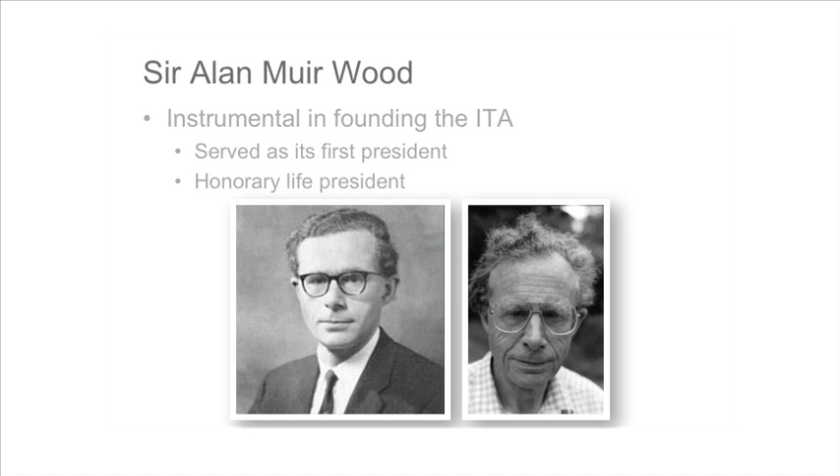Alan was always friendly, inquisitive, and encouraging to me. He was known to be conservative in his engineering views, but was open to consider innovative approaches to underground construction. We all have been blessed by his leadership. His accomplishments have made a lasting impression on the tunneling industry.

So, to continue, Mr. President, former ITA presidents, Madam Minister, delegates, ladies and gentlemen, my lecture will be mostly about machine tunneling with a historic perspective and how things have been changing and developing. I will start at the beginning with the idea of using a machine to bore a tunnel.

It started in 1846 at Mont-Cenis, not far from here. I will show a series of historic slides about these early tunneling machines, and my lecture will concentrate on pictures mostly from the Robbins Company. I hope I'm able to convey that there are many very capable competitors in our business - I just have more Robbins slides than any of the others.

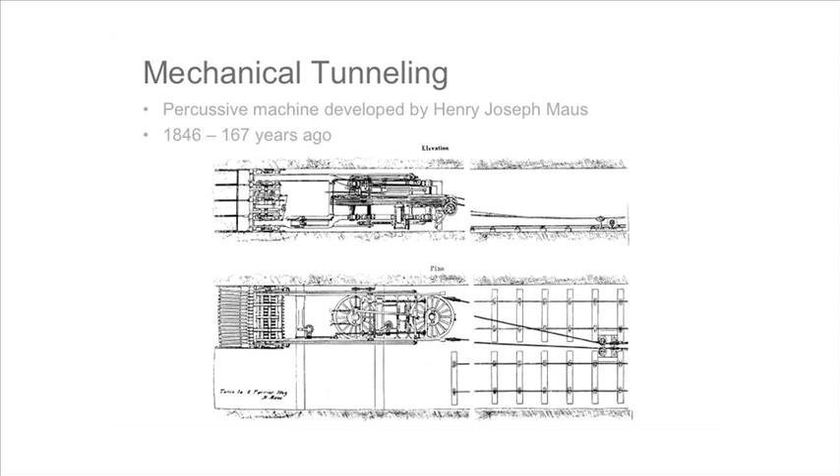In 1846, a Belgian mining engineer, Henri Maus, conceived of the idea of building a tunneling machine to bore a rail tunnel in hard alpine rock to make an improved connection between Italy and France. His concept was a percussive drill employing 80 drill bits, each operated with a spring-loaded striker. This was before we had compressed air, before we had even dynamite, and the job finally came to the use of black powder, because this machine, although it was heavily tested, didn't make the grade.

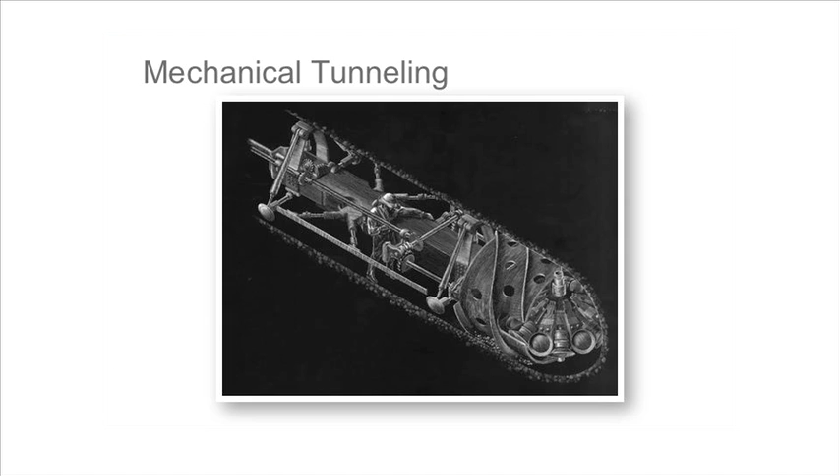Another machine was designed and built only 5 years after Maus, in 1851, by Charles Wilson in Boston, Massachusetts. This machine was meant to bore the Hoosac Mountain Railroad Tunnel. It eventually bored only 3 meters in very tough metamorphic rock before being abandoned. But it employed some very ingenious features - a rotary cutter head, in this case with double rotary axes, and disc cutters. Rolling cutters were even then recognized as being essential to boring hard rock.

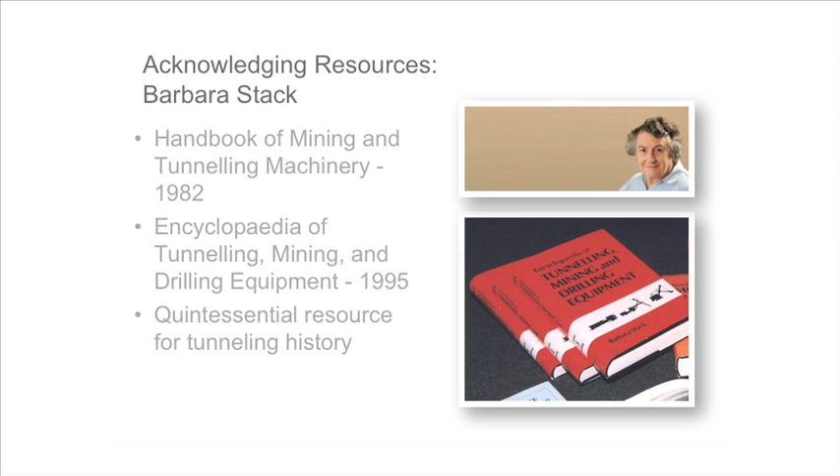So, to acknowledge Barbara Stack - we would have no knowledge of this fascinating history of tunneling machines if it were not for her. She is an Australian researcher, historian, chronicler, and marvelous writer. We owe this huge field of knowledge to Barbara Stack. We've used some of her information to put together a timeline and include a few more ancient slides in addition to those of Maus and Wilson.

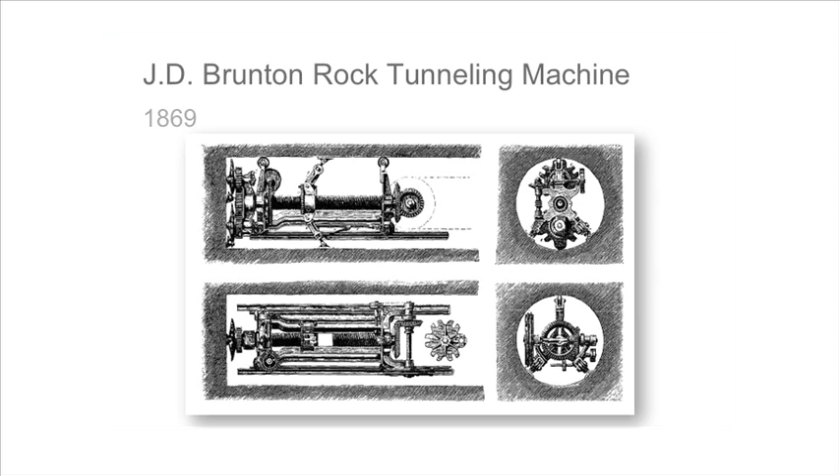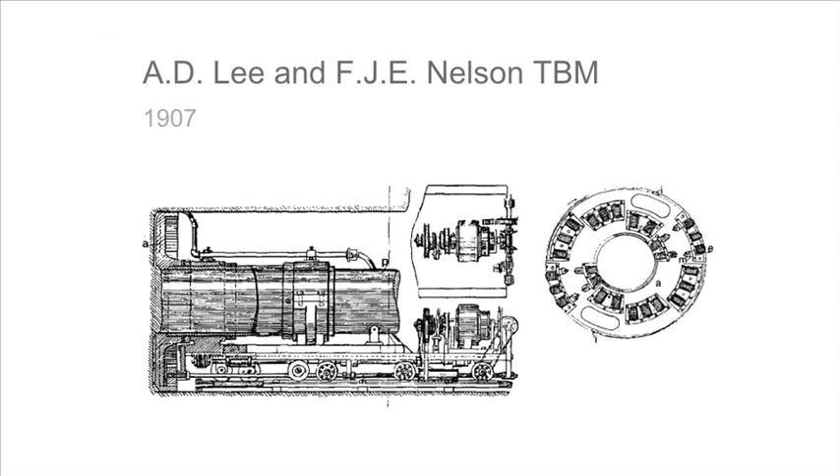We now come to Cooke and Hunter in 1865, Brunton in 1869 with satellite disc cutters, a Spaniard named Unanue in 1903 with 17 percussive hammers run by steam, Lee and Nelson in 1907 with 26 gear-type rotating cutters cutting about 90% of the area of the face but leaving a large central core to be removed independently, and Whitaker, a machine tested on the Channel Tunnel site at Shakespeare Cliff in 1922.

So that's just a few of the ancient tunneling machines. Barbara Stack identified 45 different types of rock tunneling machines between 1846 and 1952. Tunneling machine development seems to have come in bunches, with gaps of 10 to 30 years. Many of these inventors must have believed they were the first person to conceive the idea of a tunneling machine.

That was certainly the case with my father, James Robbins. My father, Jim Robbins, was a mining engineer and an inventor. He moved his family from Alaska, where he was mining gold, to Chicago, Illinois, when the mine was forced to close due to the Second World War.

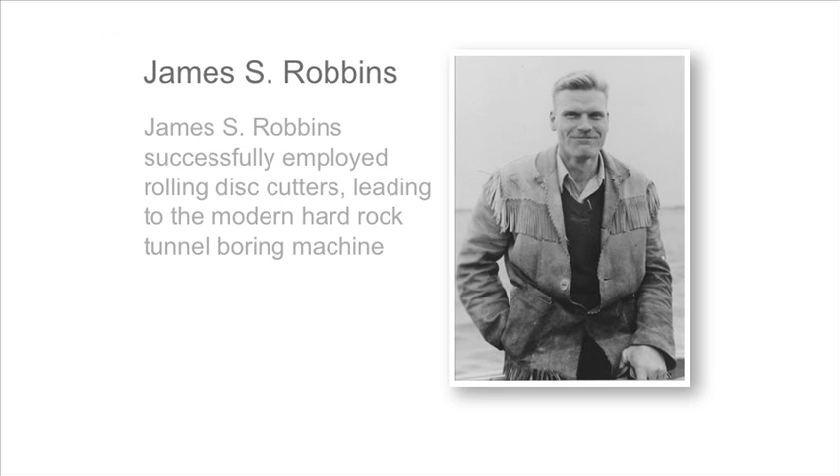In that area, he started consulting with Illinois coal mining companies, and he discovered an old mining machine that hadn't been used for many years. Jim Robbins was funded by the CW&F Coal Company to rebuild this machine and try to make it work, which he did. That's the first machine that he built, or rebuilt.

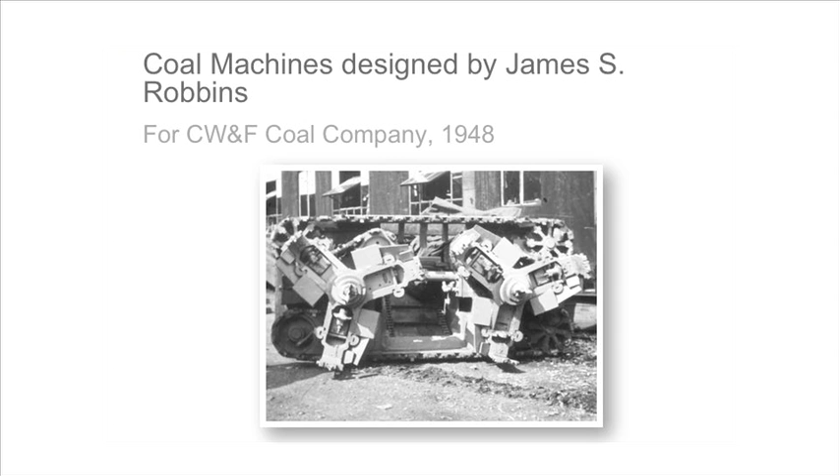The next slide shows the view of the coal face, with the cutter heads and a trimming chain bar to make the top and bottom flat. You can see the pattern of the cutters.

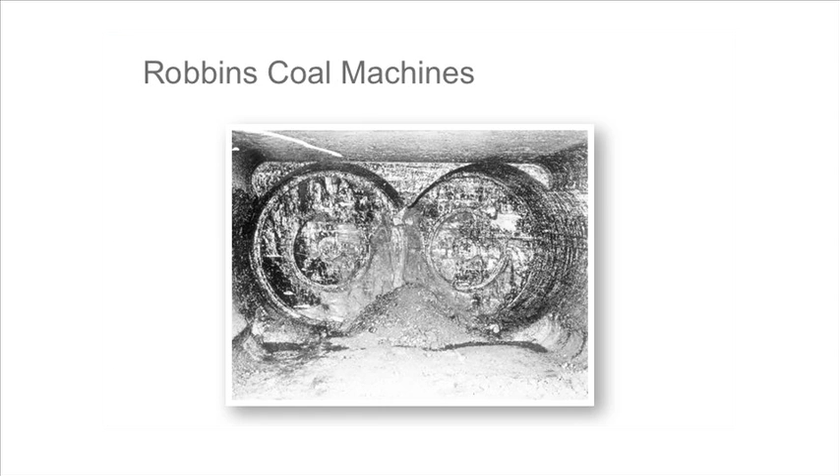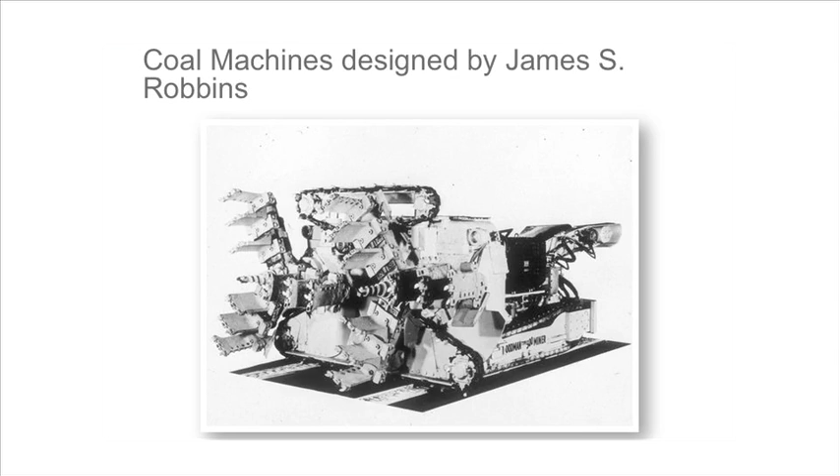Jim Robbins built 4 coal miners between 1947 and '51. He sold this development and his 14 patents to the Goodman Company of Chicago, a manufacturer of electric mining machinery. Now we're into 1950.

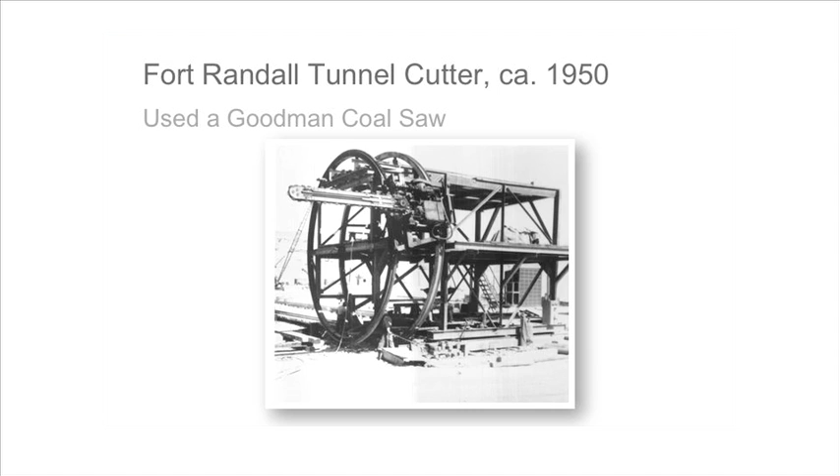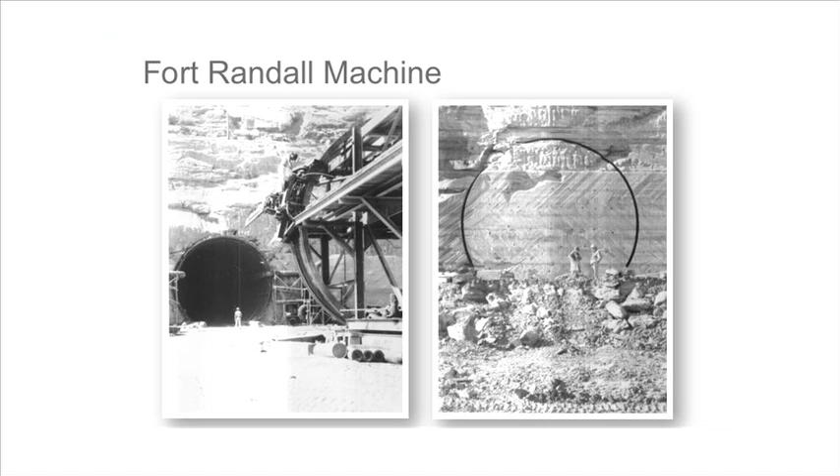Here we can see the Fort Randall Dam on the Missouri River. This tunneling system was unique, possibly due to the fact that there was weak shale rock in the tunnels that had to be built at Fort Randall. The Goodman coal saw was used to cut the periphery of the tunnel, and the central block of rock was blasted. The Oahe Dam, further upstream on the Missouri River, was to be the next major project.

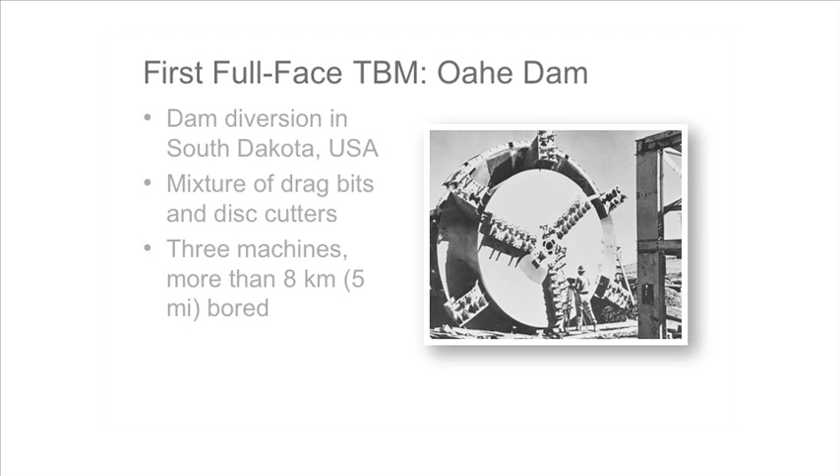Here we can see the first tunneling machine for the Oahe Dam. Jim Robbins convinced the contractor, F.K. Mittry, to allow him to design and finance the construction of a machine that would bore the entire face and eliminate blasting and loading.

This machine was the first of the new age of rock boring tunneling machines, starting a new era that has lasted to this time and on into the future. This machine broke an existing world tunneling record of 18.5 meters in an 8-hour shift. The machine was an economic success for Mittry, who made a profit.

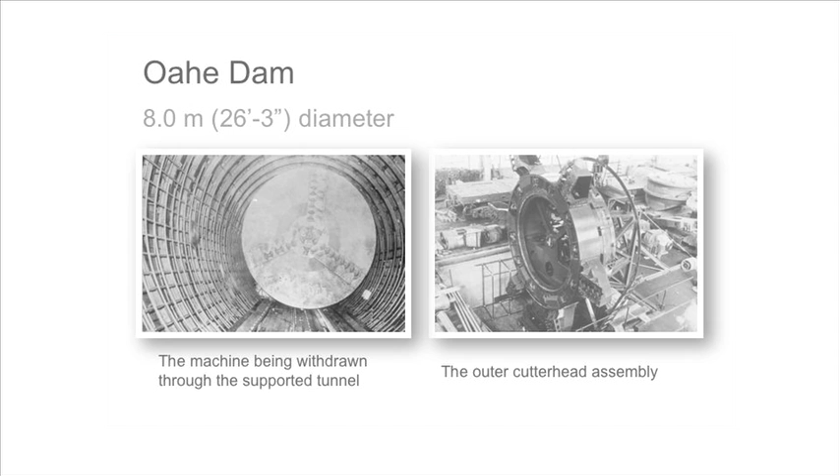This is also a novel experience for a tunneling machine. This machine and 3 others for this project were completed. They all completed their work, and the machine tunneling this was a first.

Between 1954 and '57, several smaller hard rock machines were built to bore sewer and water tunnels, and the rock proved to be too hard - in this case dolomitic rock in Chicago, and limestone and sandstone in Pittsburgh. None of these machines were a success, and all were withdrawn from their tunnels.

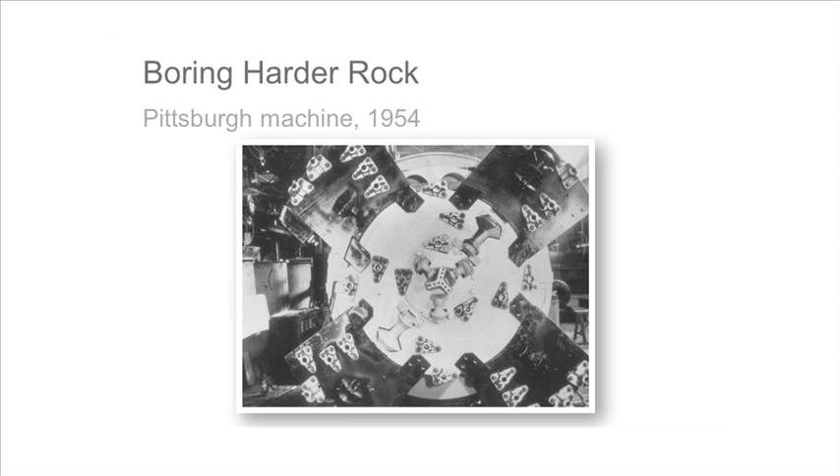Here we can see the Pittsburgh sewer tunnel with layered hard sediments, and the marks clearly show the drag pick grooves and traces of rolling disc cutters in between the grooves. These picks failed very quickly.

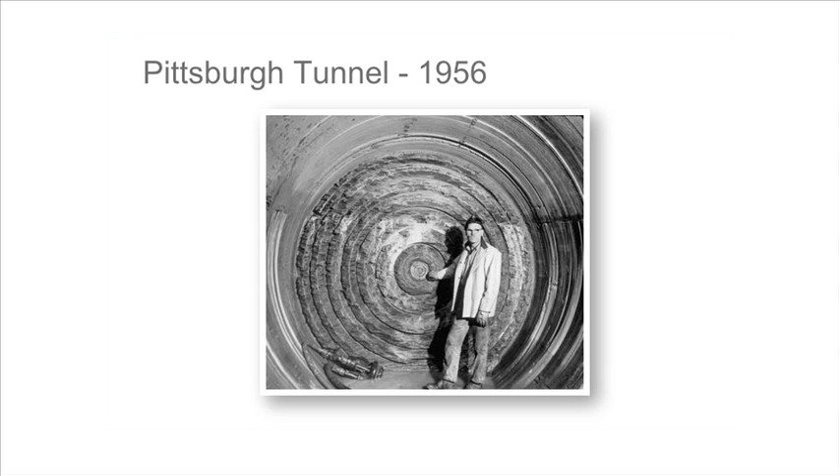Now in 1956, the Humber River sewer was built near Toronto, Ontario, and there was a very significant breakthrough here in machine development over the last 100 years. The engineering materials were now harder, tougher, with better bearings and better seals.

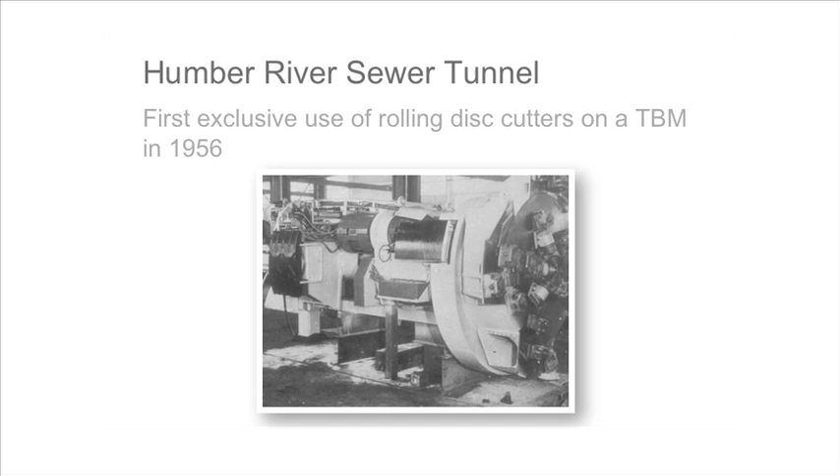And here you can see the way the previous tunneling cutter systems were, with the drag picks and the disc cutters rolling between them.

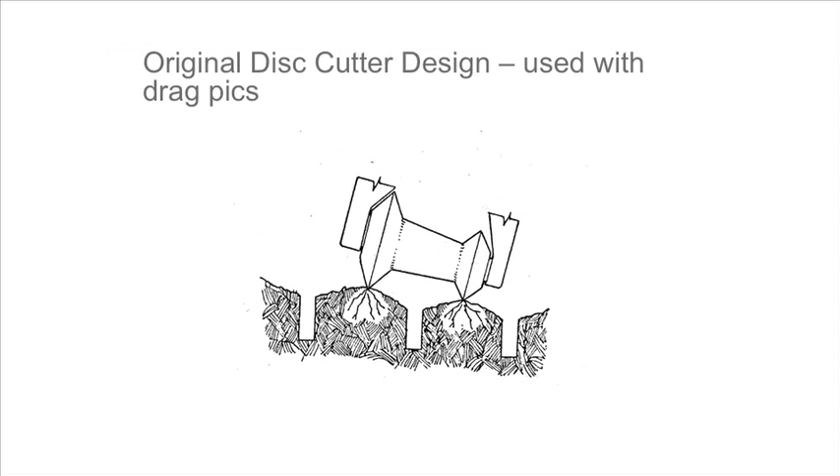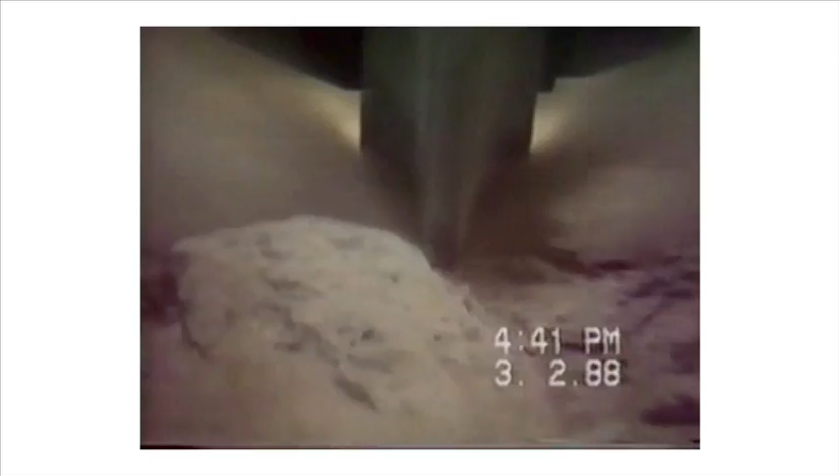Now I will have, I hope, a little video here - a tunnel breakthrough, and then a laboratory test at the Colorado School of Mines in their rock laboratory. So you can see how these cutters work - they're basically just crushing the rock.

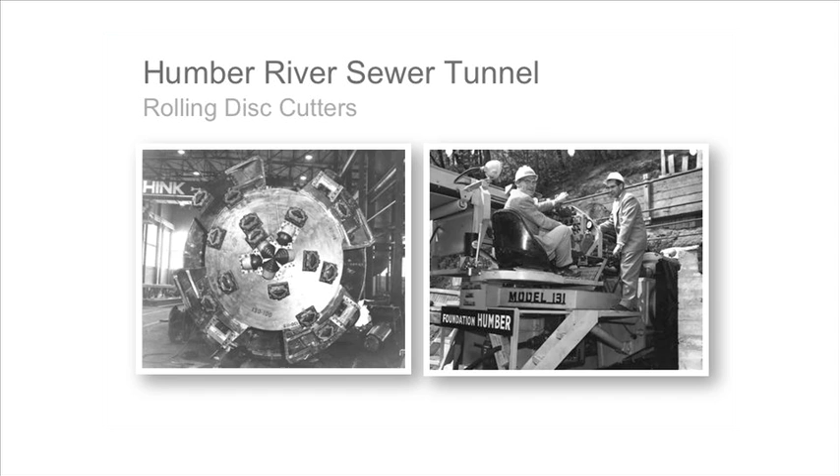Here you see a view of the cutter head designed for only disc cutters, and there you see Jim Robbins in the driver's seat of that machine. This was a very important breakthrough, and this use of disc cutters only in hard rock has survived for the next 60 years, and then, of course, sometime into the future.

A year and a half later, Jim Robbins died in December 1958 when he crashed his airplane. His contribution to machine tunneling was profound.

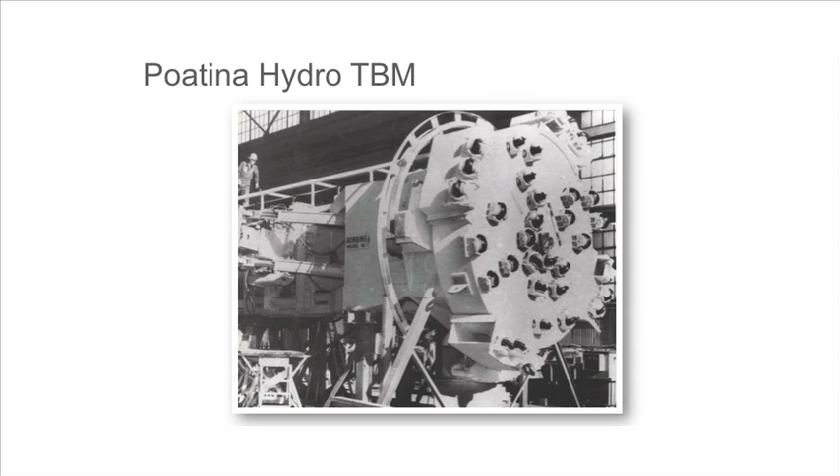So here we see the Poatina tunneling machine from Tasmania. It was built in 1959 and '60. The owner, the HEC of Tasmania, was the ideal contractor to push forward and develop more machine tunneling success. They could fix anything that needed to be fixed or modified. They just needed really good cutters and the basic machine to work, and that's what they got. Here we have also an unusual gripper mechanism, which we developed at that time.

This feature allowed the cutters to last much longer because the machine could be steered continuously. This machine achieved a tunnel rate of 229 meters in one 6-day week. This was another world's tunneling record.

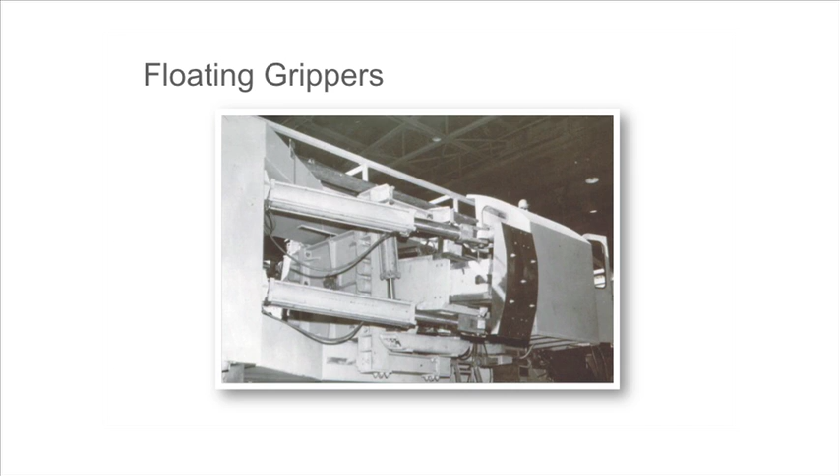With the advent of several tunneling machines achieving real success, an increased number of contractors began to see this equipment as a possible new tool to consider when bidding a rock tunnel. When several machines set world tunneling records for advance rates, tunneling machines became even more appealing. This fact was also noticed by construction equipment manufacturers.

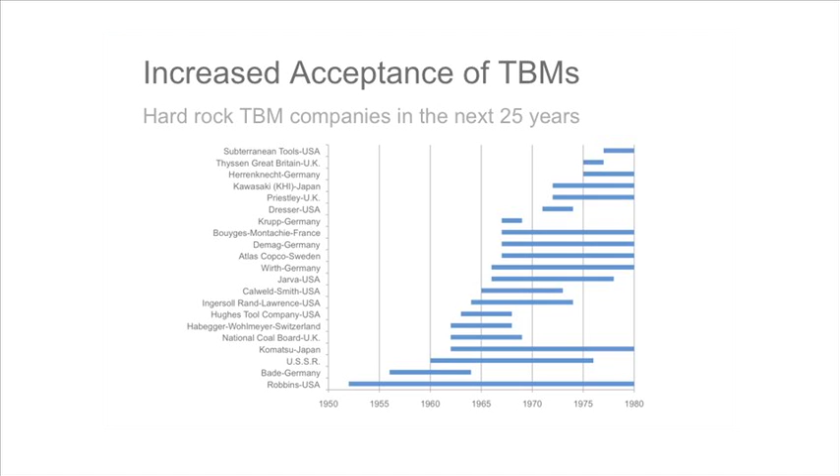So we have here a rapid explosion of designers and builders of tunneling machines around the world. From the US, from Sweden, from Switzerland, Japan, Germany, and the USSR were some of the first to operate in this manner. Some manufacturers built only one or two machines. Others, like Atlas Copco of Sweden and Wirth of Germany, continued to work on improving their technology for a period of the next 40 to 50 years. And we'll run through these very, very quickly.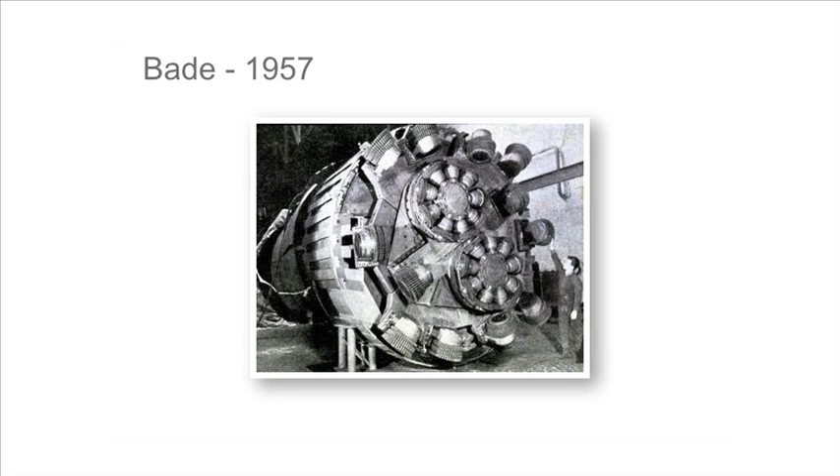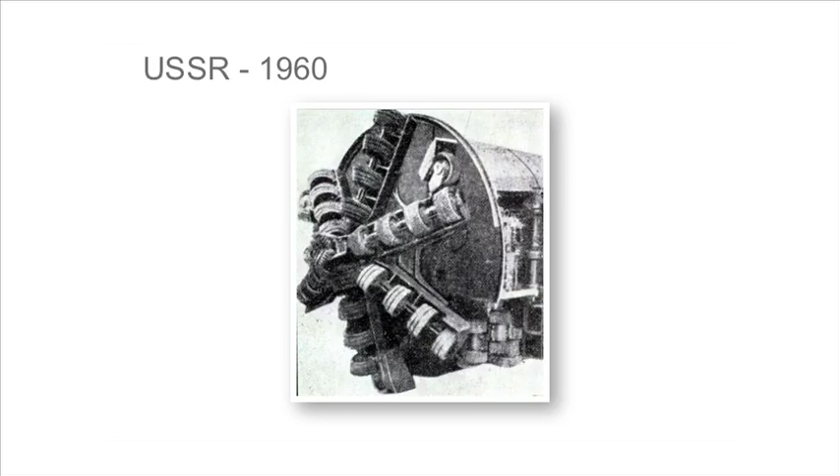Bade Company in Germany in 1957, very unusual design. The USSR had built this tunneling machine in 1960, also gear-type rolling cutters. The Komatsu tunneling machine in 1963 - Komatsu became a licensee of the Robbins Company, and they built a shielded hard rock tunneling machine which could expand and retract within the center of that hard rock shield.

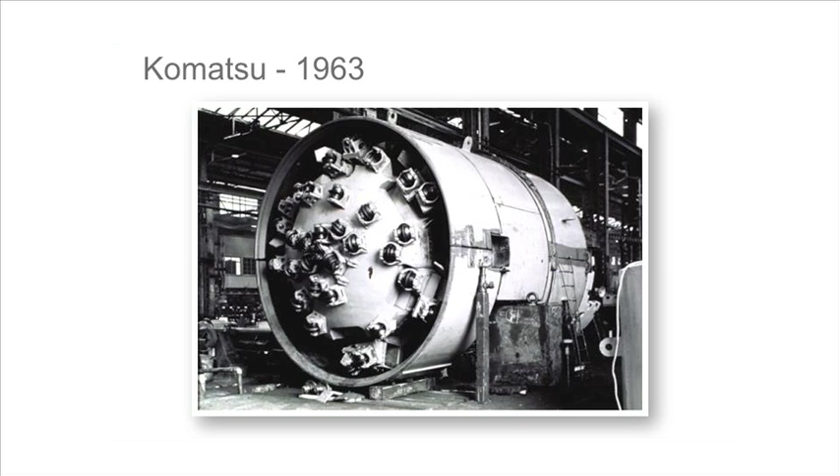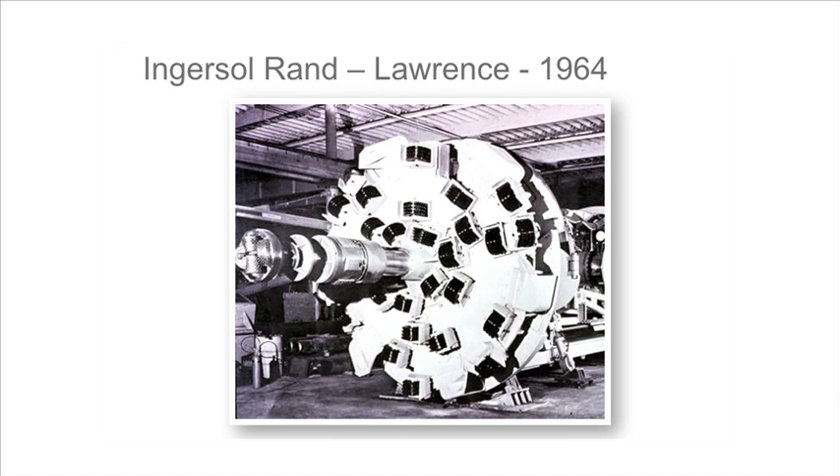Ingersoll Rand and Lawrence in 1964 built this kind of machine with a pilot pull capability, and it actually gripped and pulled the entire machine forward for its cutting thrust. This machine was built by Hughes Tool Company in 1965. It was called the Betty 1. It completed a very successful long water supply tunnel and was the first machine to use electronic lasers to steer the machine.

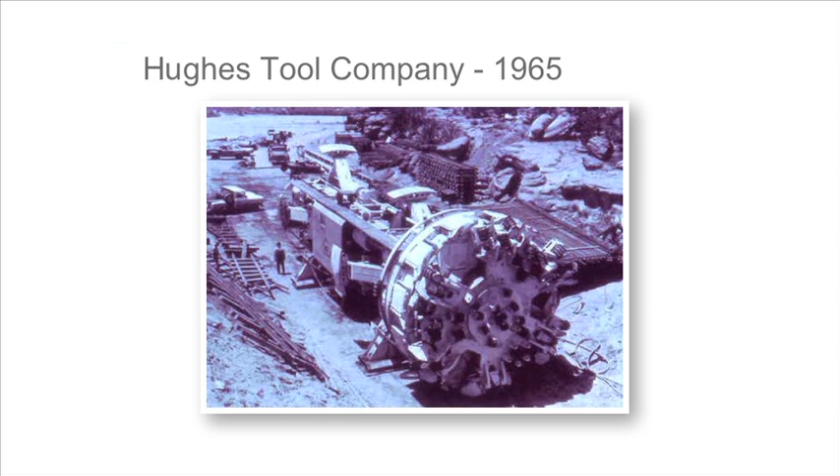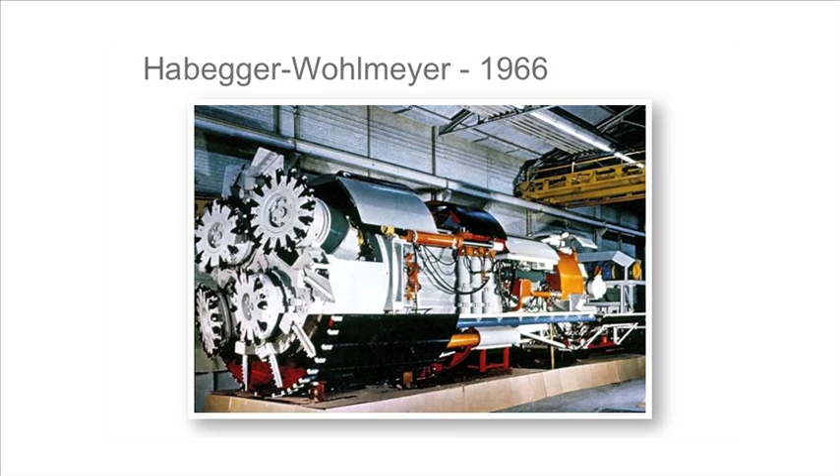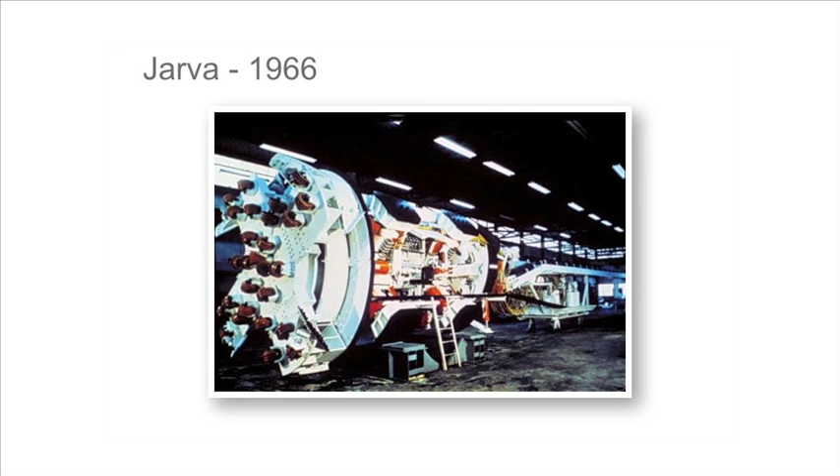The next is a joint project here from two countries, Habegger and Wohlmeyer in 1966. Habegger of Switzerland and Dr. Wohlmeyer of Austria conceived of this undercutting technique, which was very successful in very hard rock, but the cutters didn't last very long. So this became a development which was acquired by Atlas Copco. Then Jarva in 1966 in the US built a whole series of tunneling machines quite successfully, and they also were acquired by the Atlas Copco Company.

So now to discuss some new directions which the Robbins Company took, starting a bit further back. In 1961 and '62, the Robbins Company was offered the opportunity to design and build a high-speed rail tunnel machine for Paris, for the Paris RER Metro. This was in very mixed ground, rock and soil, well below the water table and running right near the Seine River.

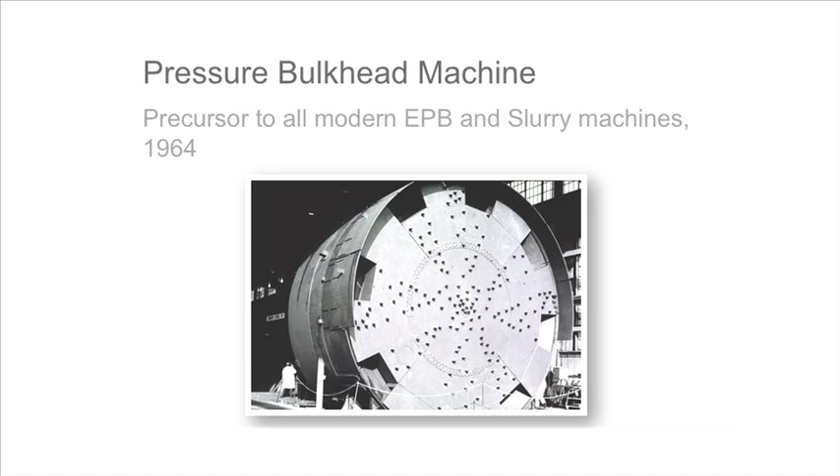This required the new machine to work while excluding the groundwater while the rock was being cut and evacuate the rock out of the tunnel. This was a case of a successful innovation - the first rotary cutter head pressure bulkhead shield.

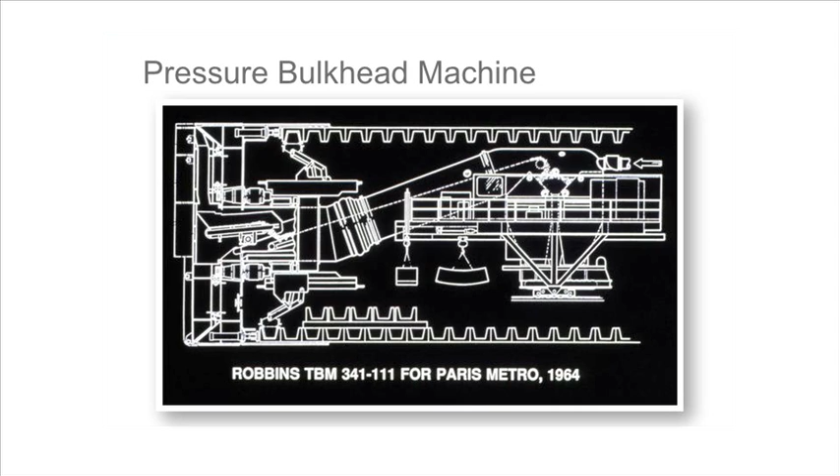This machine used compressed air behind its rotary cutter head to control the water pressure and support the face while allowing men to operate in free air. It was 10.3 meters in diameter, and the machine withstood up to 2.5 atmospheres of pressure. Here you can see the cutter head of this machine being lowered at the Étoile in the middle of Paris, and the kind of segments which were used, which were bolted and sealed. So there were a lot of new features in this.

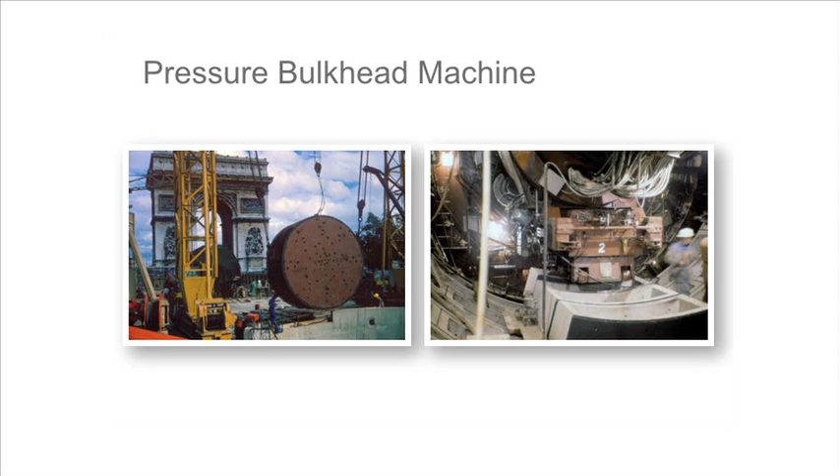So now another new development: double shield for bad rock. The design was originated by myself on a flight from France to Italy. The machine utilized two shields, interlocked, that protected the machine and the tunnel from rock falls from the tunnel face to the point where the segments were installed.

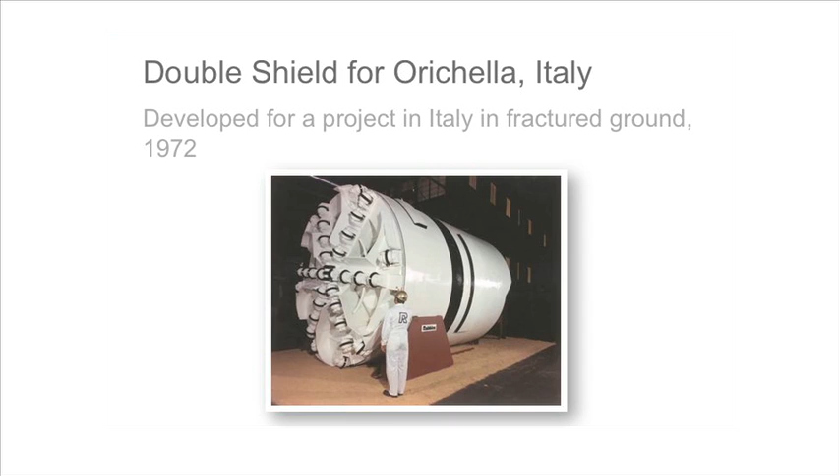I had made a visit to Carlo Grandori in 1972. Carlo was using a 6.4 meter open rock boring machine installing precast concrete segments at the Brasimone tunnel. That was also a new concept. So I reviewed my sketches with Carlo Grandori, and his reaction was positive. The company - this is the SELI company, his company - was positioned to be in the forefront of the double shield tunneling machine from then on.

The next project is about the Channel Tunnel. A few years later, the Channel Tunnel was again on the top burner. This tunnel was of world significance because it had been under design and startup for over 100 years at this point.

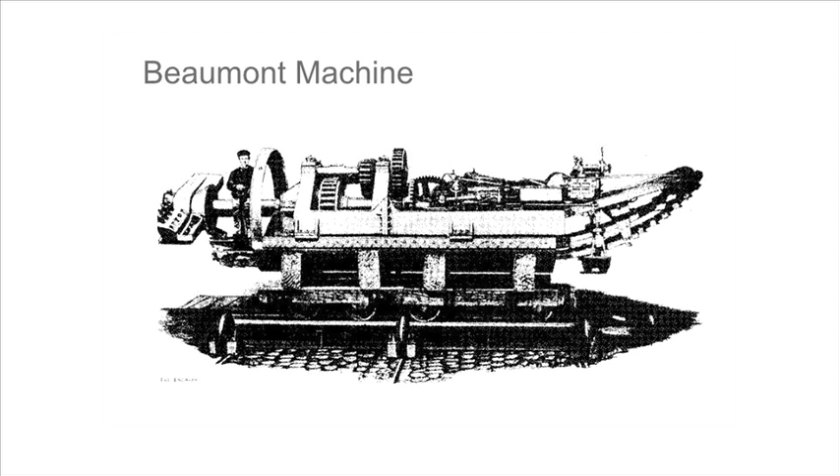Here's one of two machines built by Colonel Beaumont, which bored 1.8 kilometers of tunnel at that time before work was stopped due to political pressure.

But then we have the next near start for the third time, which was 1973 and 74, when two machines were built, one by Robert Priestley Limited and the other by the Robbins Company.

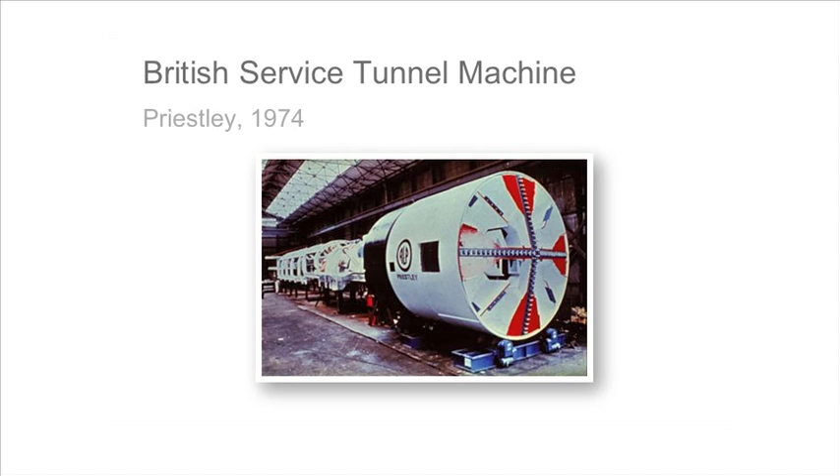The project was canceled by the British government just as the Priestley machine was completed and delivered. However, a 30-meter long test tunnel was built to demonstrate what the machine could do, and it did very well. They bored that 30 meters and could have just kept going.

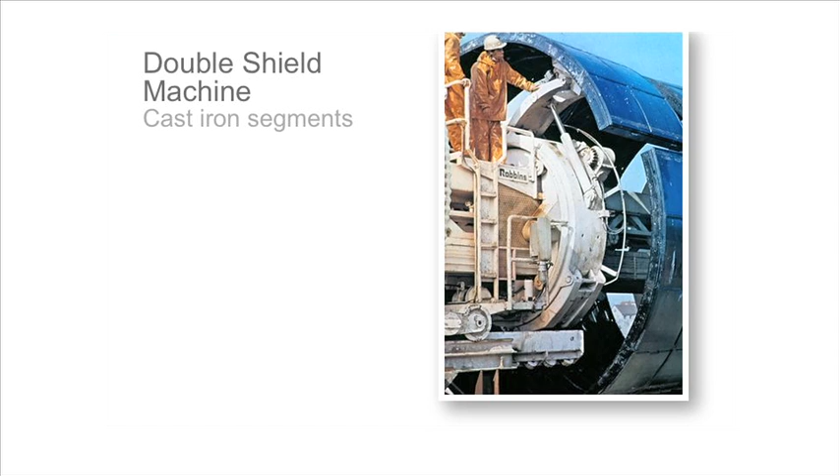The Robbins machine at that time - in 1974, Priestley and Robbins were together. Robbins' machine used cast iron segments erected within a double shield. This machine was never put underground, but eventually was boring sewer tunnels in Turkey.

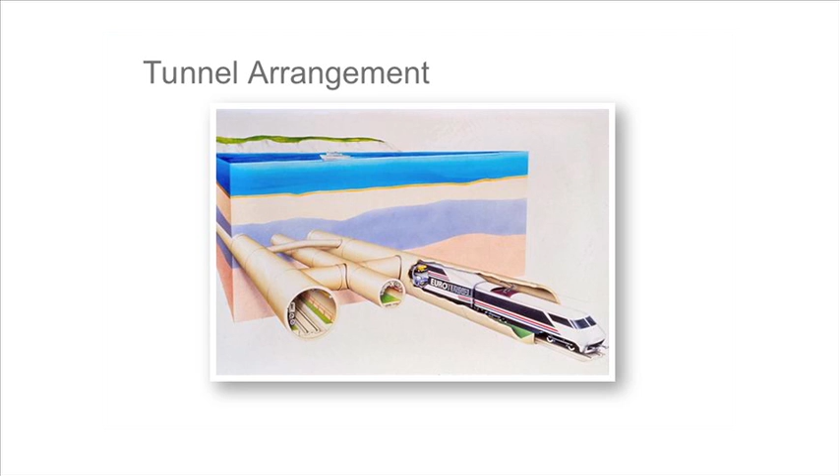Then in 1987, and this is a story that most of us already know, final approval for the Channel Tunnel was given, and this was the job that would actually get done. France and Great Britain signed the agreement, by Francois Mitterrand and Margaret Thatcher, and here you can see there were 3 tunnels. They required 6 machines for the undersea portion of the tunnel and 4 other machines for the land-based approaches. And we'll go quickly through these.

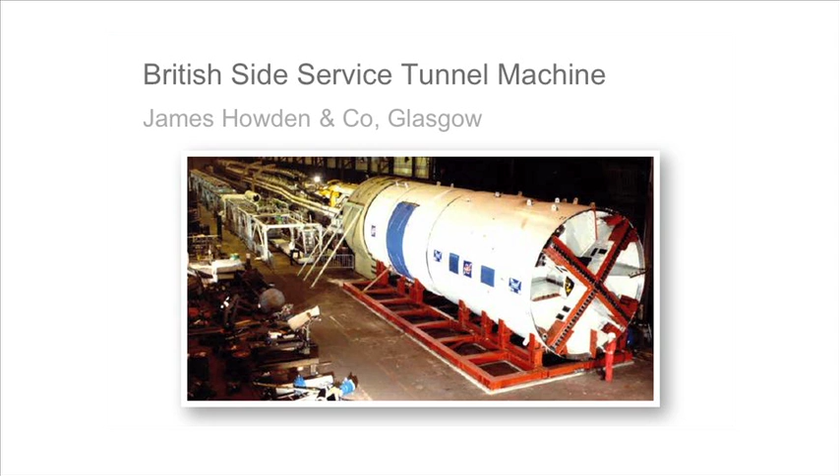The British side service tunnel machine was built by Howden and Company from Glasgow, and it was a double shield machine. This was a design which was based on our patents, and we were induced to agree to a license arrangement here in order to remain qualified for supplying the other British machines. And we are very happy that we did that.

The machine used on the French service tunnel, here, was an articulated single shield with a telescoping cutter head. This machine would work in very, very weak rock below the sea, up to 10 bars of pressure.

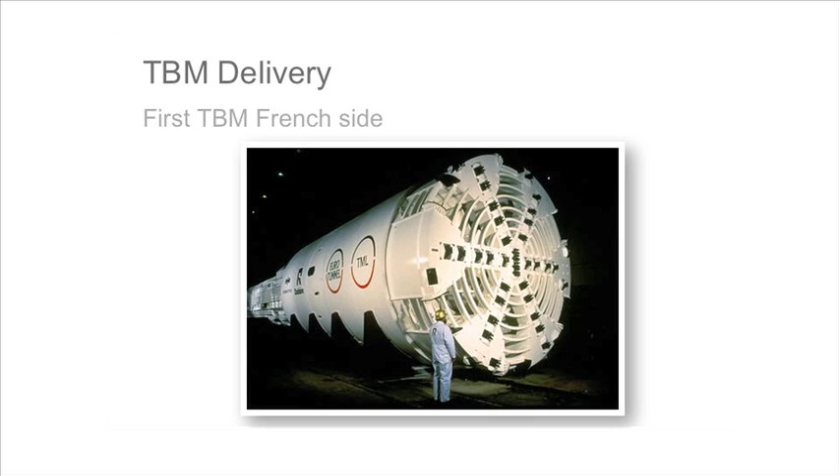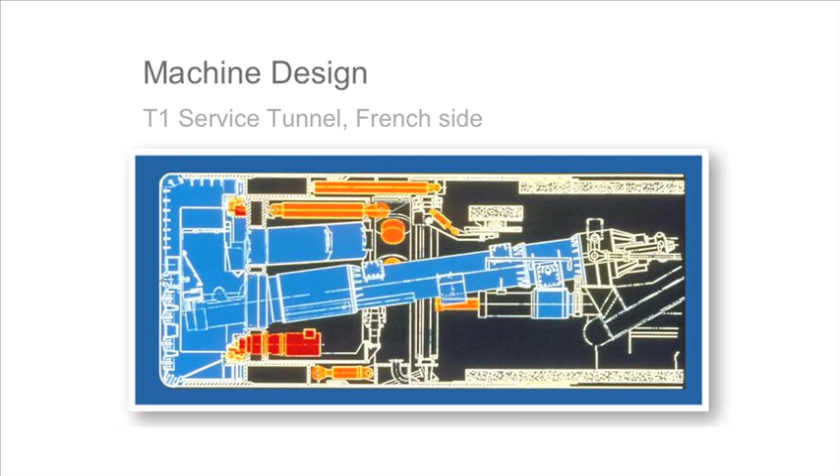This machine used the first large diameter double piston discharger to lock the tunnel muck out from this very high pressure into atmospheric pressure. You can see here the light blue is the pressurized part of that machine, which was 5.6 meters in diameter, and the double piston discharger at the very back of the screw conveyor.

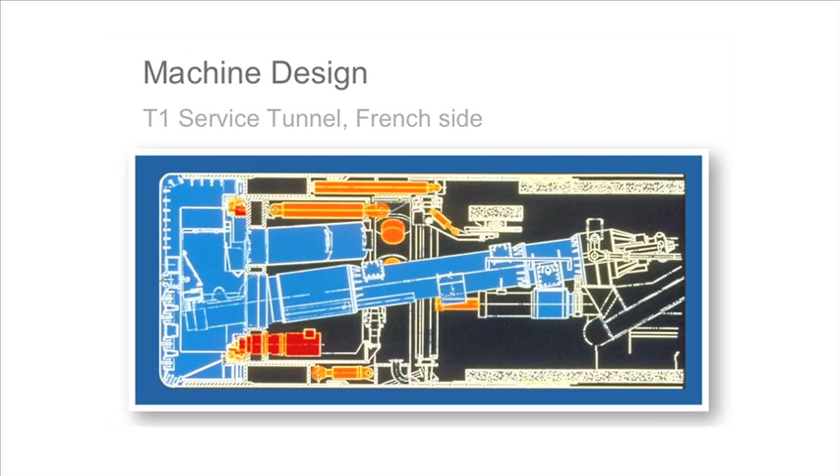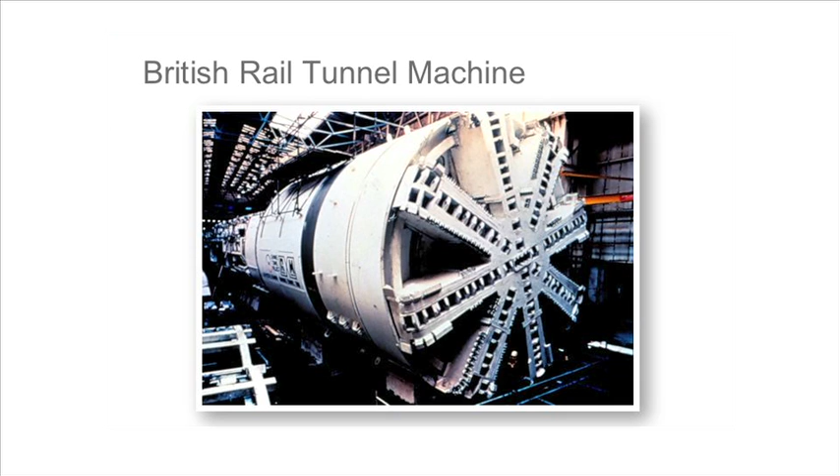The British side running tunnels, which were the main rail tunnels, are shown here, 8.3 meters on the British side, and on the French side, this was a telescoping cutter head design like we had designed for them.

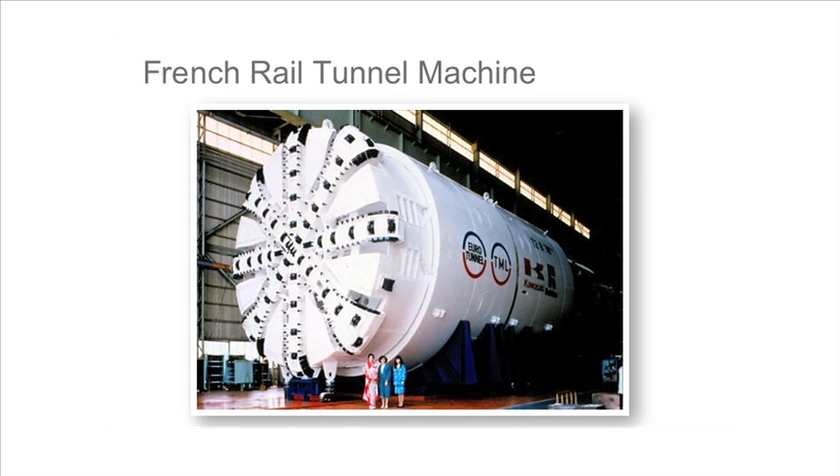This was a joint venture between Robbins and Kawasaki of Japan. Most of this equipment was built in Japan and in France, and they used a backfill grout very close to the cutter head so that there was less chance of failure.

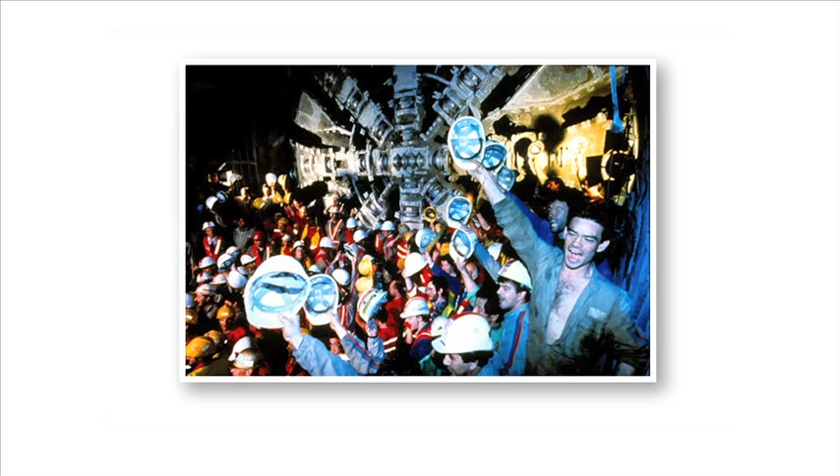Two service tunnel machines were completed in 1991. There was a ceremony with a breakthrough at Dover Castle. This is a shot of two breakthroughs occurring again when the main rail tunnel is completed, as the French machines bored into the openings connected by the British machines.

So here we have a little discussion about concepts that did not work. And actually there were quite a few.

The first one I show here is a walking gripper machine built in 1962, stepping back now quite a ways. It was a 2.2 meter sewer tunnel in Virginia. The idea was to use these 8 longitudinal grippers just behind the cutter head. This machine really did not work, so we modified it very quickly into a regular gripper type design. This hydraulic system was way too complex for us to fix in the tunnel.

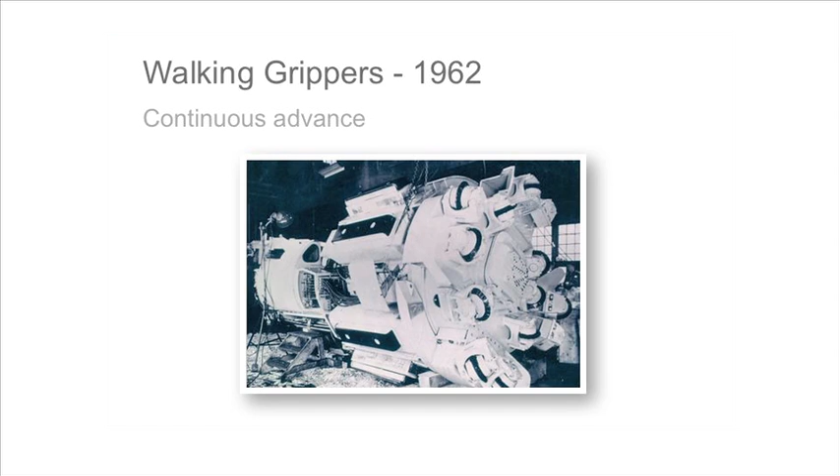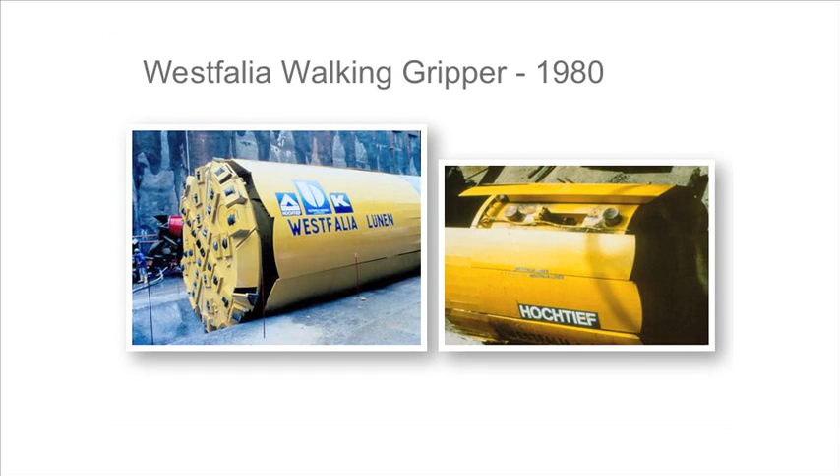Next here is a Westfalia Lunen walking gripper in 1980. This machine was for a project by Hochtief for a rail tunnel. It had the added complication that the concrete lining was pumped in behind the shove jacks and used as a thrust reaction. At the same time, it pre-consolidated weak rock. It did work, but was never tried again.

And so a few comments now about the culture of risk. Risk seems to grow for very heavy construction as the world economic system deteriorates. One possible solution is to use new models of contracts. New contracting models have been studied by the ITA and several other groups.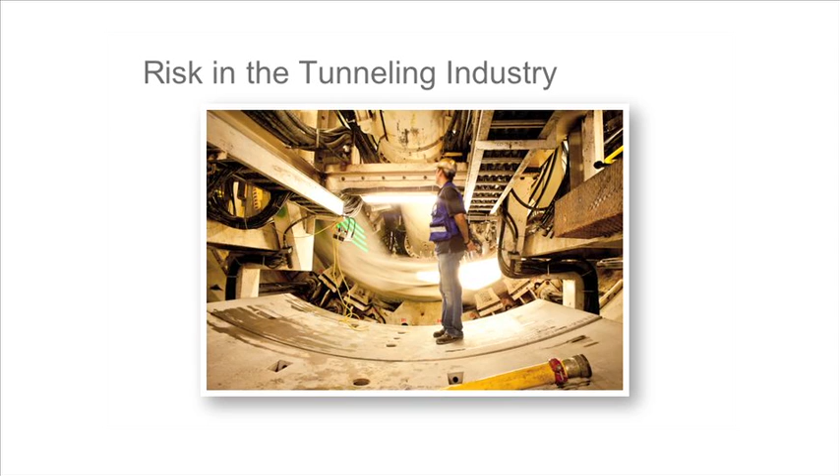Design-build adds a lot of new responsibilities to owners and contractors. The build, own, operate system was expanded with financial partners. Bigger projects may increase risks and increase political risk for the public. Litigation risks increase and legal issues become more important, so standardization and simplification become very appealing.

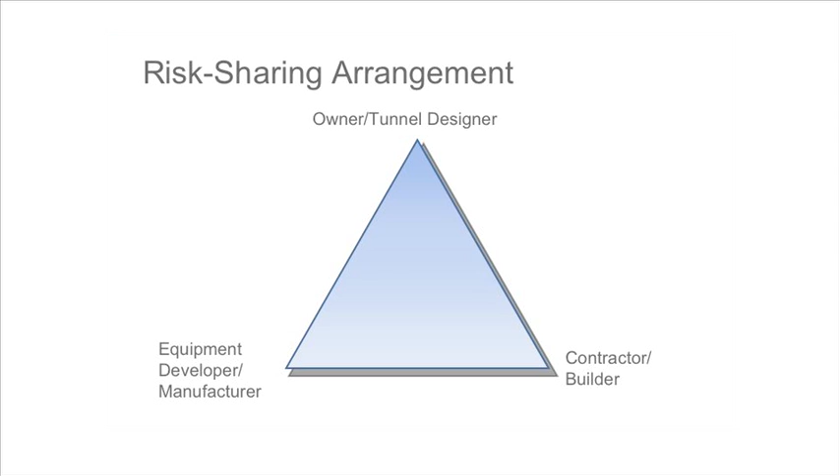Here's a classical risk-sharing relationship: the tunnel owner or designer at the top, the contractor tunnel builder on one side, and the equipment developer and manufacturer on the other. This has to be balanced and understood by all parties. When we start making huge mega projects out of these jobs, the responsibilities of the three parties become quite complex.

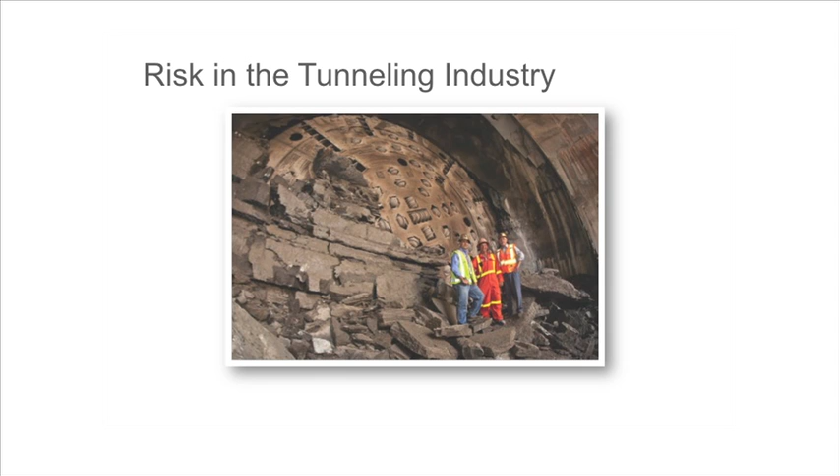In seeking relief from these risks, experienced international tunneling contractors have begun to look to emerging markets in Southeast Asia, the Middle East, and Eurasia. Contracting practices in these areas are growing and may provide a more welcoming environment to innovate designs and solutions, and a less litigious atmosphere.

We have some recent innovations here. The SR-99 tunnel in Seattle, Washington is a state route that is an economic challenge and a trend for limiting risk. Examples can be found where innovation is encouraged. SR-99 in Seattle is a replacement for a waterfront elevated viaduct damaged by an earthquake.

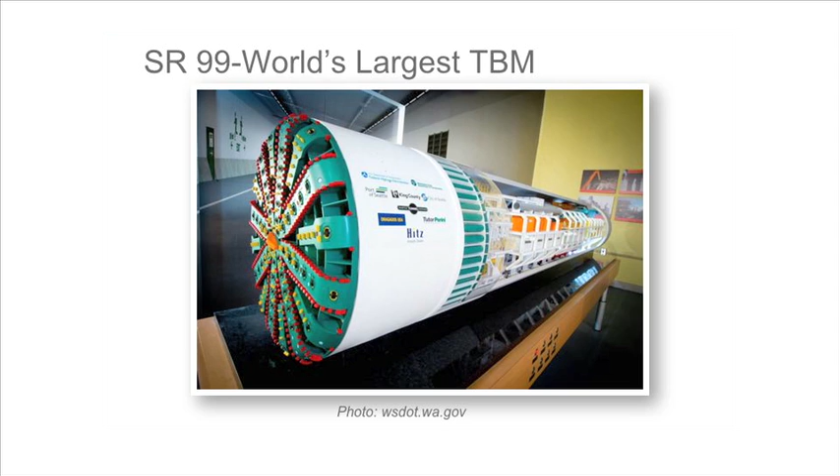Here we can see this is a model of the world's largest tunneling machine, 17.48 meters in diameter. The prime contractor is Dragados of Spain, with Tutor-Saliba and Perini as partners, and they selected Hitachi Zosen of Japan to design and manufacture the machine.

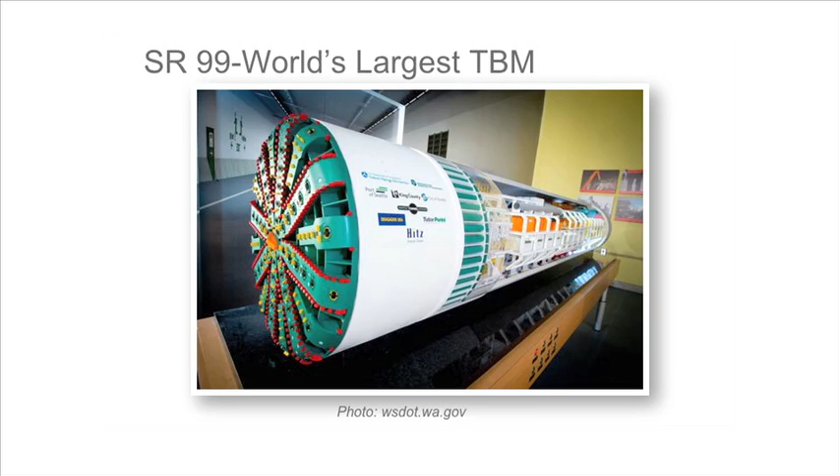Pressure compensated disc cutters are part of one of those innovations, with 7 bars of potential pressure, and these are under assembly at this point. You can see the machine is not yet assembled fully at the job site in Seattle, and the new pressure compensated disc cutters are shown here.

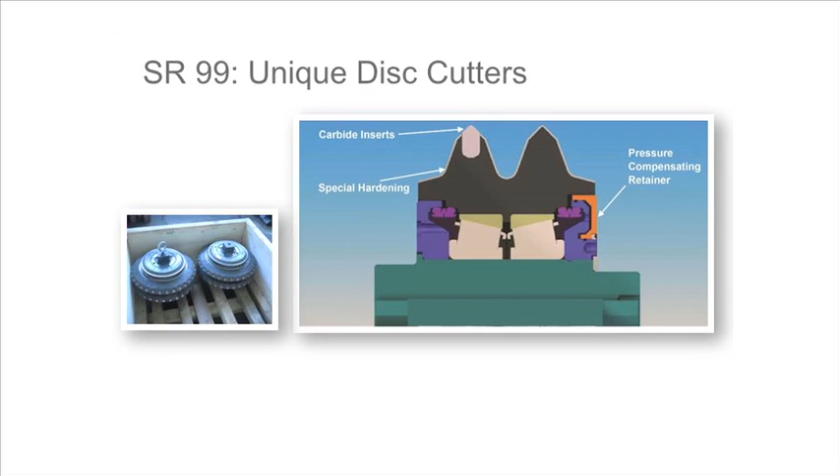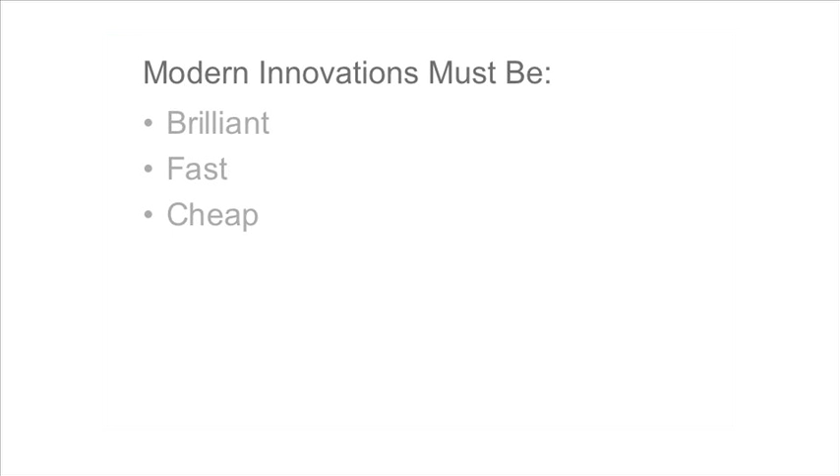So more on the modern innovations. In my opinion, these should be brilliant, fast, and cheap. There are many opportunities to make improvements in tunneling machines. This concept was developed by a contractor from Ontario, Canada, and is to provide a continuous, flexible support system very close to the tunnel face.

This method solves a need simply in a way that works. It can be implemented quickly and is relatively inexpensive. We've used this design for the Olmos project in Peru under the high Andes Mountains. This job has very severe rock bursts, which the machine was able to go through, except for the worst possible ones, which just crushed the machine.

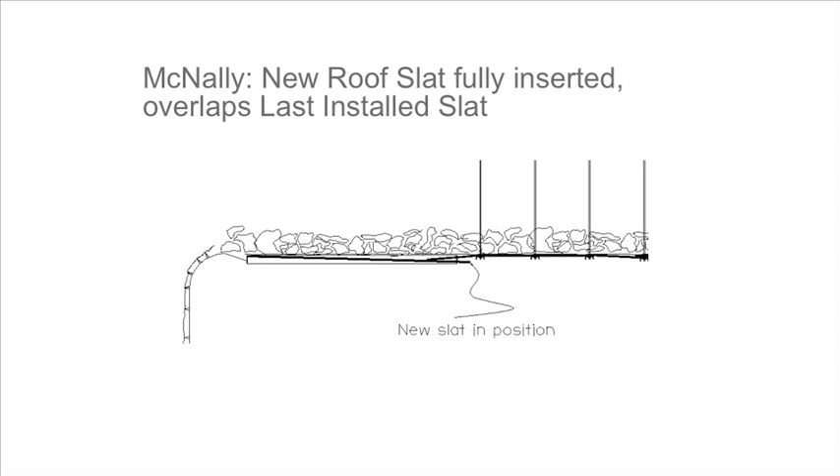These support elements are longitudinal slats. There's a great deal of advantage in using longitudinal supports, and pockets are included under the roof canopies. Here's a design drawing that shows how these slats are installed, overlapping, held together with rock bolts and very light segments of ring beams.

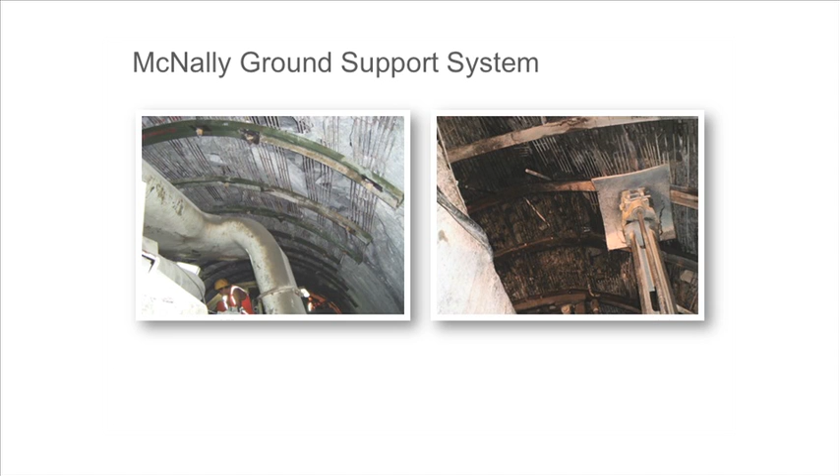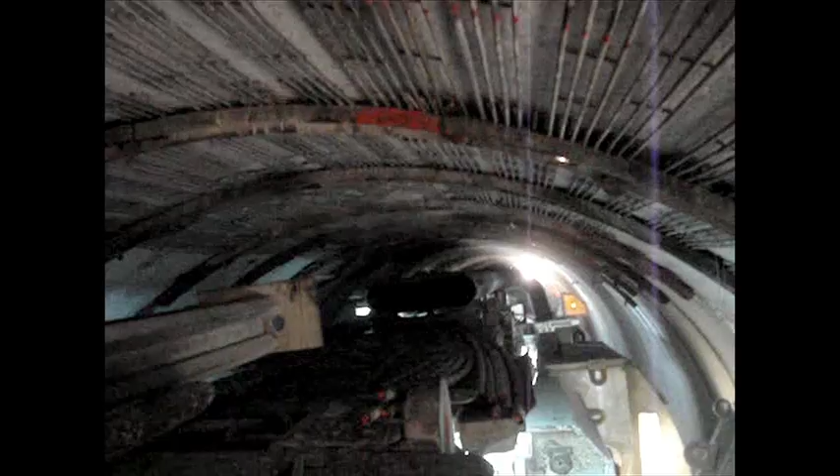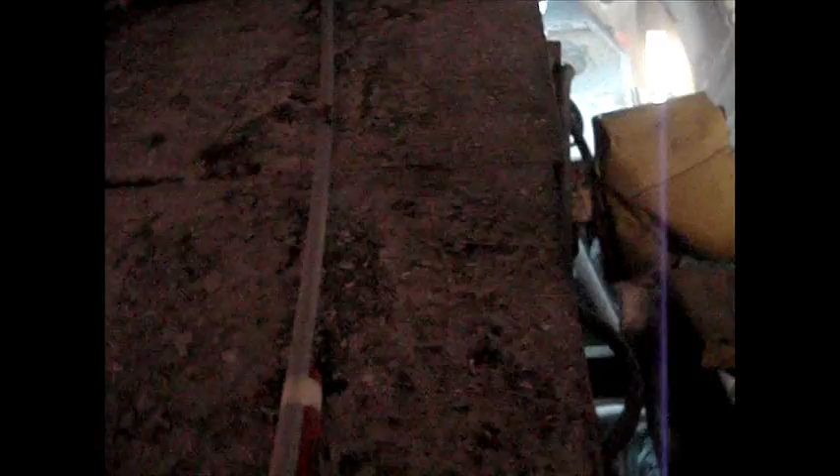Now there is a little video here, and you can see this. The bangs and noise are small rock bursts. There you can see the supports are still holding this up, even though the machine is actually sort of coming apart.

Let me continue a little bit to conclusions here. One of the current ITA initiatives is ITA Tech, and we've heard a little about that. This group is pushing new concepts forward in a manufacturing-centered group. They strive to achieve a consensus, and good work has already been achieved, including main bearing ratings and low rebound shotcrete, among other things.

Let me make the last comment, if I may. In epilogue, those of us who spent much of our lives in underground construction find pride in innovative design. The way forward is the future of tunneling through collaboration between the ground, the tunnel openings, and the people who work there. This is our environment.

We should pass on the excitement of creativity to young engineers, builders, and designers, both men and women, to follow our future underground. Thanks to all of you for the opportunity to speak to you.